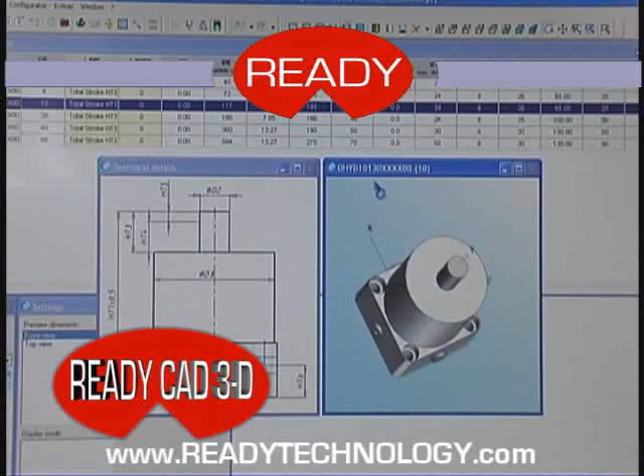Another powerful tool to help with your design is ReadyCAD 3D. ReadyCAD 3D has the complete specifications of all the Hydrocam H1 and H2 units available, including Ready Technology's other products. These images can be dropped directly into your CAD programs.

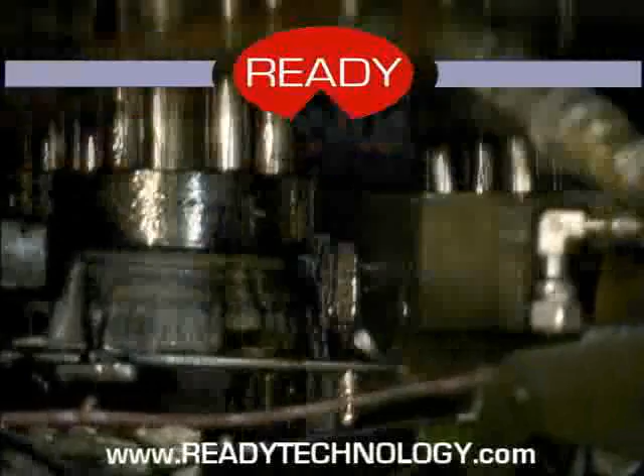The simplicity and versatility of Hydrocam is how you will benefit most of all in your productions. From bleeding the system to maintenance, our end users often are amazed at how simple the system is to use.

The most important information that the engineers at Ready Technology require is that the installation worksheet located on the back page of the Hydrocam catalog is completed completely and accurately. Our engineers use this information to double check and make sure that the requested Hydrocam system is correct for your applications. Our intent for you is for you to be able to use Hydrocam right out of the box.

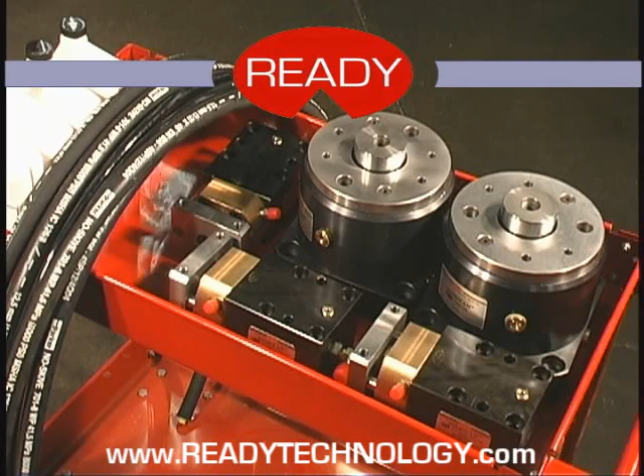Upon selecting the correct H2 piercing or forming unit, our engineers have these recommendations. For example, not to exceed 90% of the H2 unit's rated force because the punch is going to dull, requiring additional tonnage. Be sure of your material types.

Hardness in material is not uniform or perfect. It is recommended that you allow yourself some working room when figuring the tonnage of force required for your application. If your calculations place you at the borderline of the maximum of a unit, go to a larger unit.

The mounting locations of the H2 units are only limited by your imagination or design. It is recommended that the H1 pump be mounted higher than the H2 unit. This makes the system easier to bleed. For applications that require the H2 unit to be higher than the H1, please consult with your representative. When mounting the H2 unit, remember it is designed to provide force, not guidance.

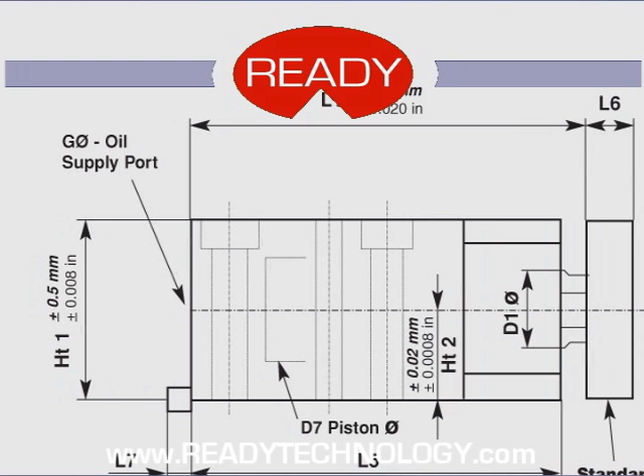Also keep in mind that the ports on the H1 and H2 units can be customized to other locations on the body of the units to best suit your application. For applications that require custom port locations, please consult with your representative.

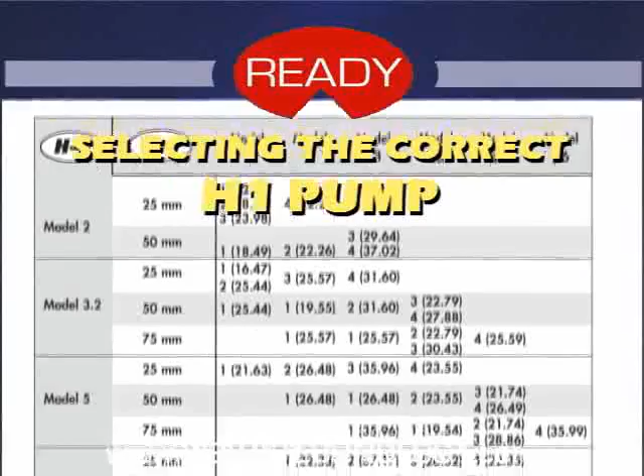When selecting the correct H1 pump, refer to the pump selection chart in the Hydrocam catalog. This chart will give you information, for example, how many H2 units of a certain size a particular H1 pump can drive. The volume of the H2 unit will determine the correct model needed. The H1 pump was designed to be able to drive up to 4 identical H2 units.

Selecting the mounting location for the H1 pump is very flexible, including customizing the H1 body to have the ports designed in the bottom of the unit. Make sure clearance has been accounted for the hydraulic hoses and the nitrogen hose if you are using the optional control panel.

If the timing of the H2 unit's piston rod extension, dwell, and retraction is needed, this is a special option that our engineers need to consult with your designers. Working one-on-one and sending a design file and explaining the function of the production can assure the proper design of the Hydrocam system.

The H1 pump's piston rod travel is critical to the successful operation of the Hydrocam system. Calculations of this travel must be accurate to assure that the H1 pump is not overstroked.

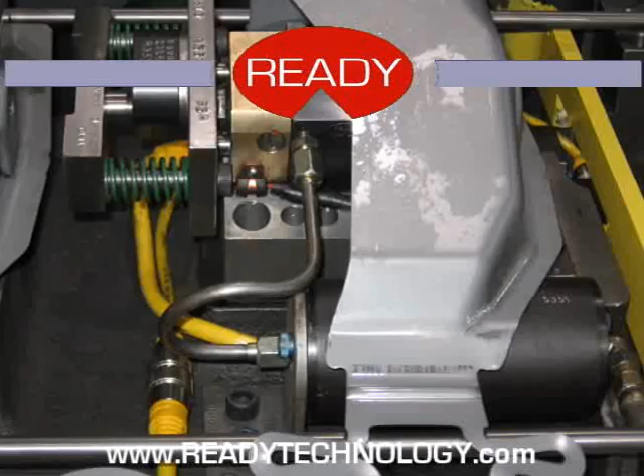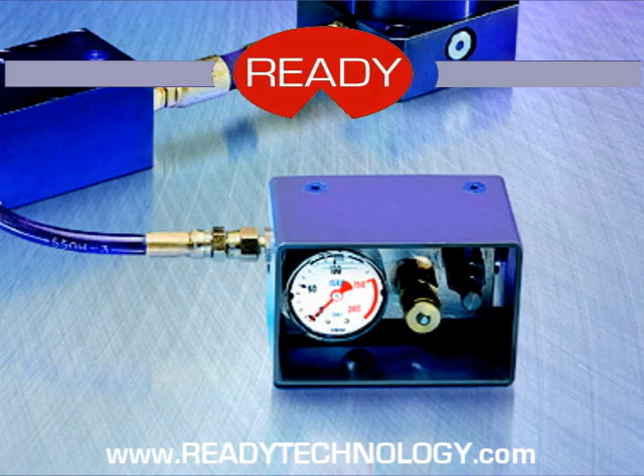In most applications, charging the nose of the H2 unit with nitrogen is all that is required. The optional nitrogen surge tank system can be used in higher speed runs to help the H2 units run cooler and to help reduce high pressure rise. Also, if you want to monitor the pressure in the H2 unit, the nitrogen control panel system can be useful.

Connecting the H1 pump to the H2 unit or units is as easy as connecting a hydraulic hose to the units.

If connecting an H2 unit to the optional return control panel, connecting the nitrogen hose. We offer a complete line of fittings to allow the most flexibility and to help reduce the number of fittings possible. Upon arrival, the length of the hoses have been customized for your application. Having too long or too short of hose can cause issues.

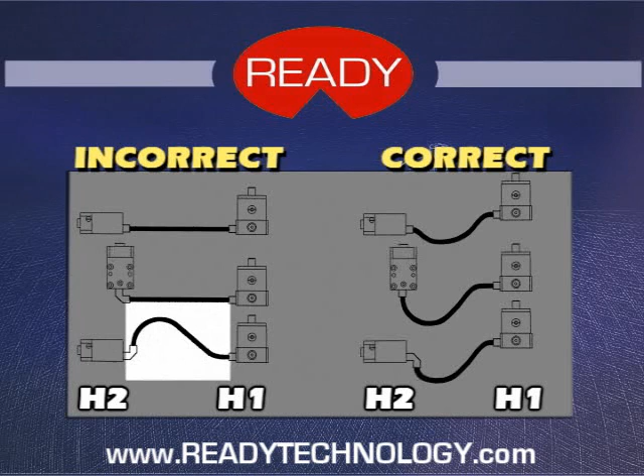Looking at the illustrations, when pressure is applied and the diameter of the hose increases, it causes the hose length to shorten. This can lead to stress on the fittings. The hydraulic hose from the H1 unit to the H2 unit should never have a high point to potentially trap air. Since hydraulic fluid can travel only so fast within the hose, having too long a hose can cause issues too. Hydrocam is designed to be able to have the two units placed up to 6 feet or 2 meters apart.

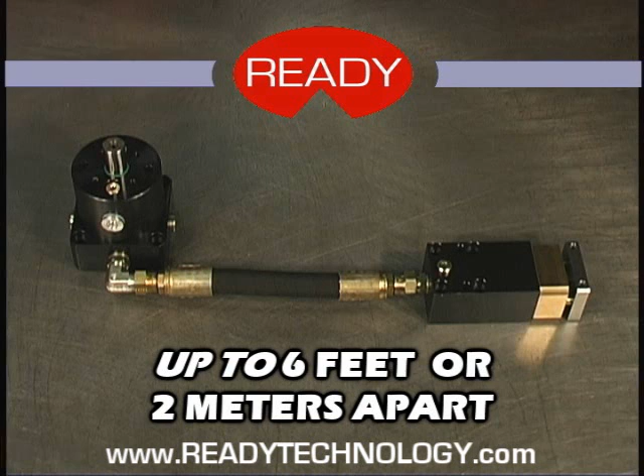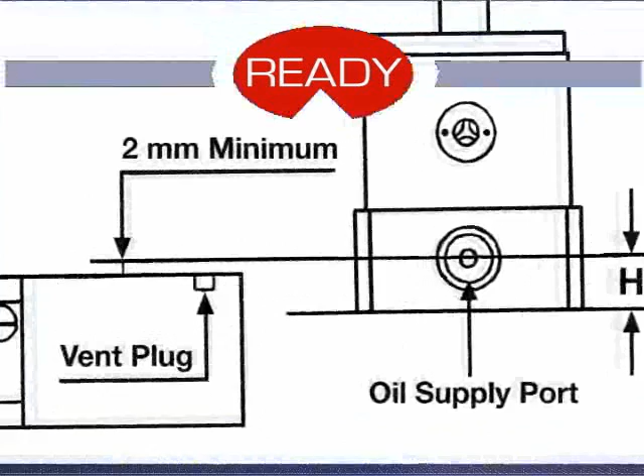With position of the H2 unit compared to the H1 unit, the H2 piercing form unit's vent plug should be a minimum of 2 millimeters below the oil supply port of the H1 pump unit. This is to aid in the bleeding process. We understand that some applications will exceed this guide, and we recommend contacting your representative.

Again, we will address the importance of filling out the worksheet for Hydrocam on the back page of the catalog. This information is cross-checked by our engineer to ensure the proper Hydrocam units are issued for your application. On the selection criteria, be sure to fill in what type of material is to be formed and its thickness for required tonnage needed. Fill in the tensile strength of the material in decanewtons per square millimeter or PSI. Also other information, for example if it is partially heat treated.

Document how much stripping force will be needed to pull the punch out of the part. The nitrogen return system in the H2 unit is not intended for stripping force. When doing punch operations, you will have to provide your own stripping force method in your tool. Since there is a maximum velocity the oil can travel within the system, press strokes per minute, travel of the ram and cam needed to be noted.

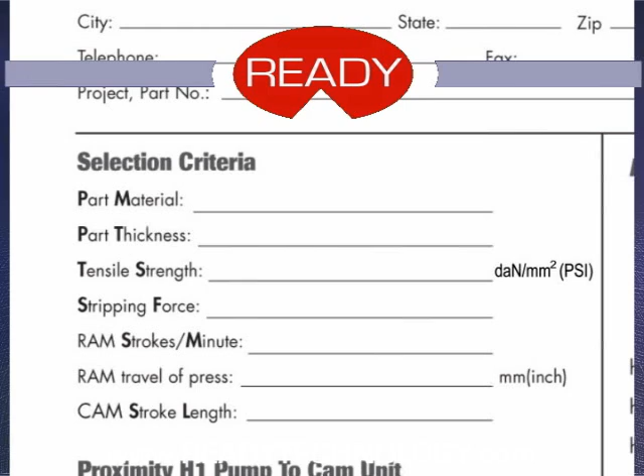For faster and stronger stroke presses, larger ports and hoses may need to be designed in the Hydrocam system to accommodate faster production rates. The proximity of the H1 pump to the H2 unit or units is intended to be kept within 6 feet or 2 meters. Contact your representative if your design goes beyond those limits. Ready Technology has an extensive line of fittings. Note any special fittings that will be needed.

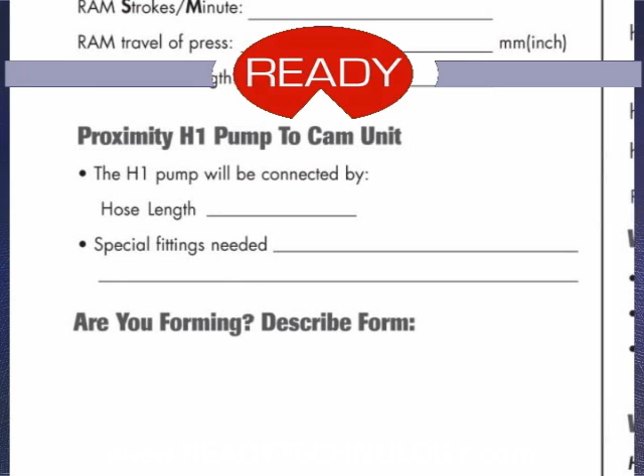If the H2 cam unit is intended for forming, describe the form and forward details such as drawings to our engineers. If the H2 unit is going to be piercing, note the diameter, shape, and if there is a rooftop point on the punch. We may be able to make recommendations to help lower tonnage and be able to use a smaller system to fit better in the tool. The shape and size of the punch will decide on how much stripping force you will need. Document the method used and if it will be used for all the holes.

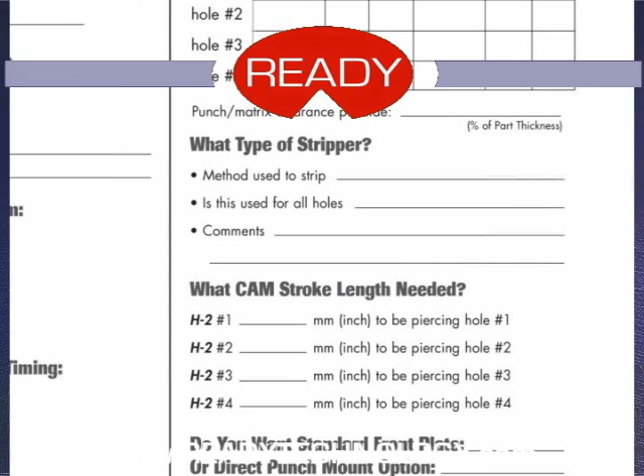The stroke of the H2 unit is very important. The shorter the unit, the more rigid and less deflection will occur when punching or forming. Fill in the stroke lengths for the corresponding H2 units. Will you want a standard front plate for punch or form orientation, or direct punch mount for round punches?

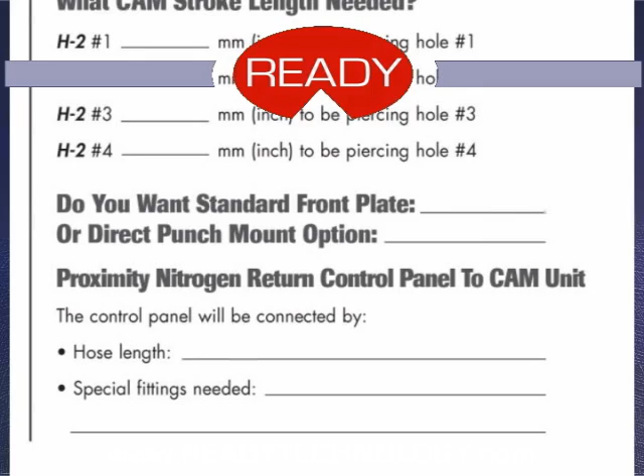If you will be using the optional nitrogen return control panel for the H2 unit, the position of where it can be placed is very flexible, preferably where it can be seen by the operator. Note the hose length and any special fittings that will be needed. Forward the worksheet to Ready Technology and prepare for the versatility of Hydrocam.